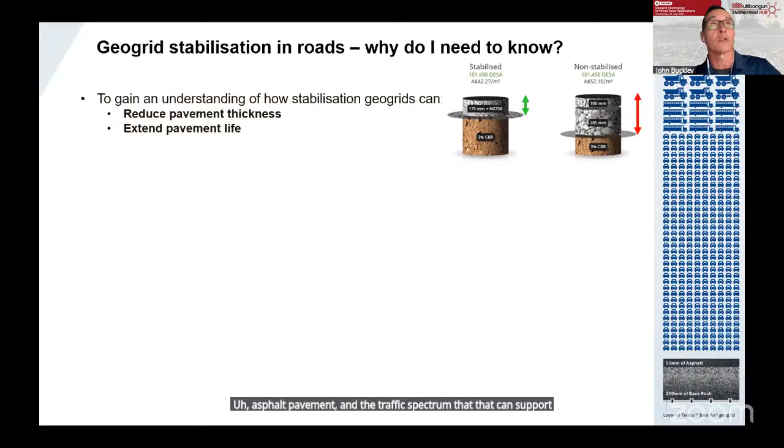So why do you need to know about geogrid stabilisation for roads? My aim in this presentation is to give you an understanding of how these geogrids can reduce pavement thickness, extend pavement life, and you can see a nice graphic there on a geogrid stabilised asphalt pavement and the traffic spectrum it can support over its design life. And then we can demonstrate how we can save cost, time, and carbon on pavement projects.

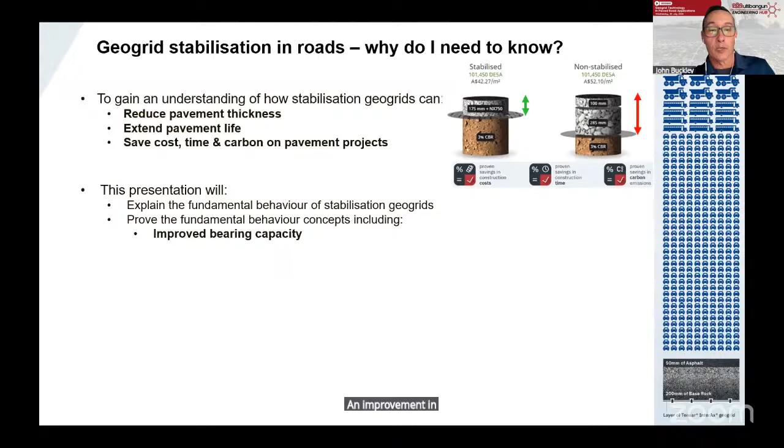In this presentation, I'll explain the fundamental behaviour of stabilisation geogrids, and I'll prove these concepts, which will include an improvement in bearing capacity of the system, enhancing the aggregate modulus, improving compactability, especially over variable subgrades, and improving the rutting performance of the pavement. That's our main performance metric, rutting.

Okay, so let's quickly talk about the main concept of stabilisation and the fundamental mechanism behind this. It's one of what we call lateral restraint of the aggregate, particularly when an out-of-plane or vertical load is applied, where the geosynthetic is placed horizontally. So the main function is lateral restraint for stabilisation, to reduce subgrade and surface deformation over the pavement life.

If we now focus on this graphic down the bottom right, there are two mechanisms occurring at the same time when a stabilisation geogrid is employed in the pavement. So under wheel traffic, if we first look at an element of aggregate above the geogrid, in the base course, as this system is being trafficked...

what this element of aggregate will experience is an increase in confining stress. This, ascribed to the stress-strain or stress-hardening behavior of aggregates, will lead to an increase in resilient modulus, or resistance to permanent deformation, of that aggregate.

Now if we look at an element of typically subgrade clay below the geogrid, as the wheel is trafficking this system, what that will experience is a reduction in shear stress to that element of subgrade clay. So through stress-softening behavior, if we reduce the applied shear stress onto the clay, we also increase the resilient modulus of the subgrade.

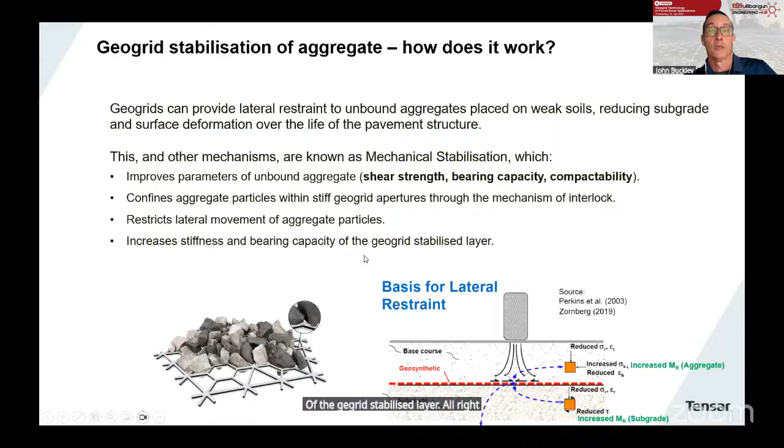Now I'll get straight into some full-scale relevant paved road research and trials. The first one we'll look at is a study done in West Virginia back in 2010. It was a comparative study, instrumented with earth pressure cells both in the aggregate layer and within the subgrade. The subgrade was a field-constructed subgrade to achieve a target CBR between 2 to 3%.

Horizontal earth pressure cells were installed in the subgrade to measure total horizontal stress, and also within the 600 millimeter thick crushed limestone paved section to measure the total horizontal stress within the subbase layer.

So the 4 sections I mentioned were a control, and 3 other geosynthetics, which included a 70 kilonewton per meter woven geotextile, a biaxial geogrid, and a multi-axial geogrid. This was trafficked with an 18-ton test truck.

The results showed that the multi-axial geogrid section had the highest horizontal stress within the subbase, but the lowest horizontal stress within the subgrade. I'll show you the results in a minute.

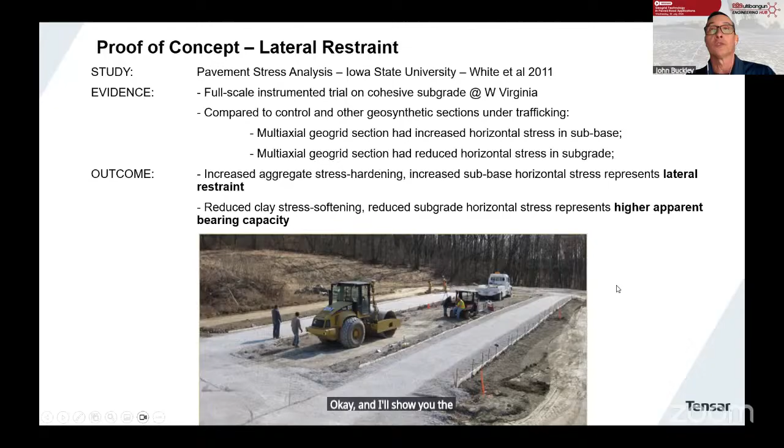If we just click over to the next slide, I'll highlight the multi-axial geogrid data there. The red line represents the control. So what we're seeing here is a graph of total horizontal stress on the vertical axis versus truck passes, with an 18-ton test truck. We can see the stress profile within the subbase layer shows the highest level in the multi-axial geogrid section, representing that confining stress applied to the aggregate.

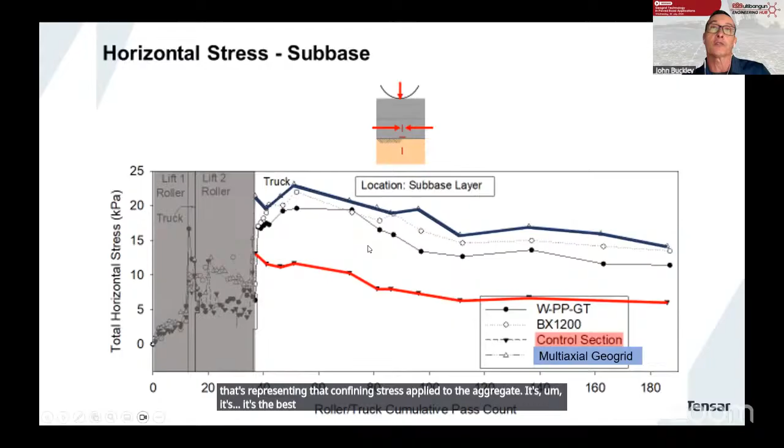Okay, so this is helping us prove our lateral restraint concept. Another aspect we want to prove is an improvement in subgrade bearing capacity.

We can do this by looking at the differences in applied stress to the subgrade clay through multi-axial geogrid stabilisation. Here we've taken a textbook chart of different consistencies of clay, from very soft to stiff. On the horizontal axis, we have the applied stress to that clay. On the vertical axis, we have its corresponding resilient modulus, which we can correlate to CBR by a factor of 10.

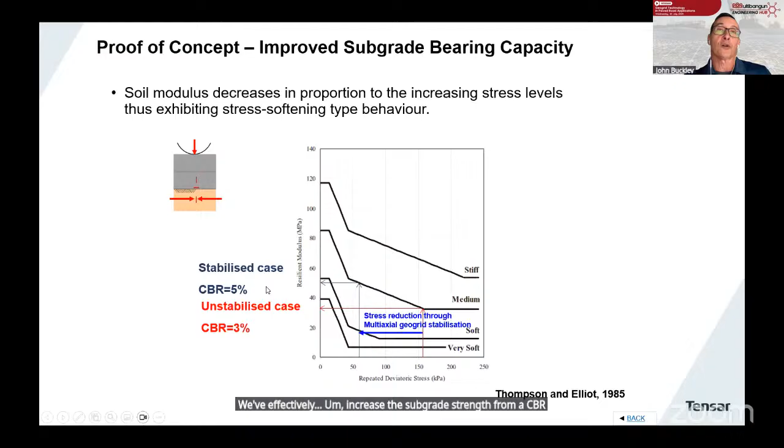If we can reduce the applied stress on that same clay through effective geogrid stabilisation, we come down to about the blue arrow and go across, and it represents a resilient modulus of about 50, or a CBR of 5. In this particular case, and this can be quite case specific, we've effectively increased the subgrade strength from a CBR of 3 to a CBR of 5. But it is very case specific, just be aware of that.

The next study I'd like to show you is one which proves the concept of enhanced aggregate modulus. This was an in situ investigation of a deep strength asphalt pavement done in Arizona, in the US, about 10 years ago, using an apparatus called an automated plate load testing machine.

So what this does - if you're familiar with the falling weight deflectometer, or FWD, that applies a seating load and then a dynamic load to the pavement, one or two or more hits. But this apparatus applies a high number of cyclic loads to the pavement, and it's able to do this very quickly, so you can very quickly back-analyze the strengths of different pavement layers in the field.

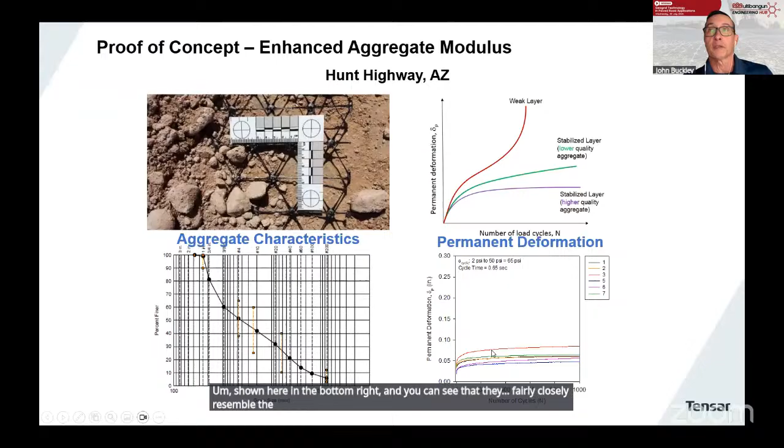Okay, so what are the characteristics of this particular pavement? I mentioned deep strength asphalt, but the subgrade CBR was not very low - it was actually reasonably high, typically higher than where you may think about using a geogrid. It was 10%. But this particular pavement had a high percentage of heavy vehicles, and ESALs over 8 million, 8.5 million actually, as a design value.

So for that reason, there was scope to include a geogrid - not so much to reduce the aggregate base thickness, because it was already heading towards a minimum thickness anyway, but there was scope to potentially reduce the asphalt thickness. This was done by looking at the design method employed for this pavement, because it was in the US - AASHTO 93. Tensar's had this as a module in its software for a long time, and it looks at layer coefficient values for unbound and asphalt layers.

Based on the thickness and a drainage coefficient, layers are multiplied then summed up to come up with an overall structural number for the pavement. So without the geogrid, this particular structural number—don't worry too much about the absolute value, but the relative differences—it was 3.87.

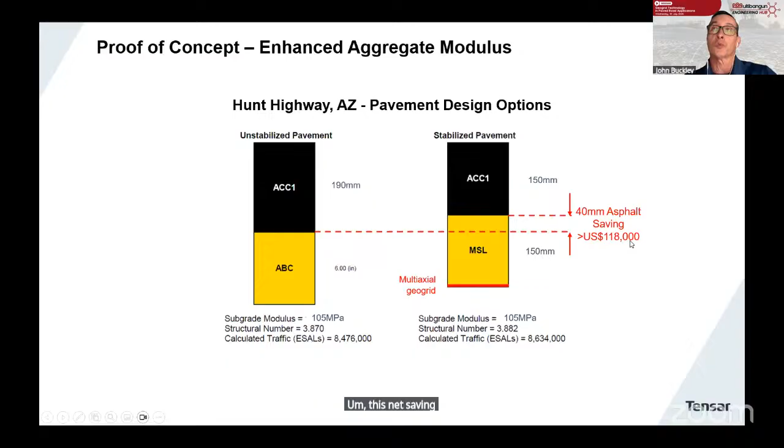This net saving was about $120,000 US up front. So that was fine—it was nice to have an upfront saving on this project.

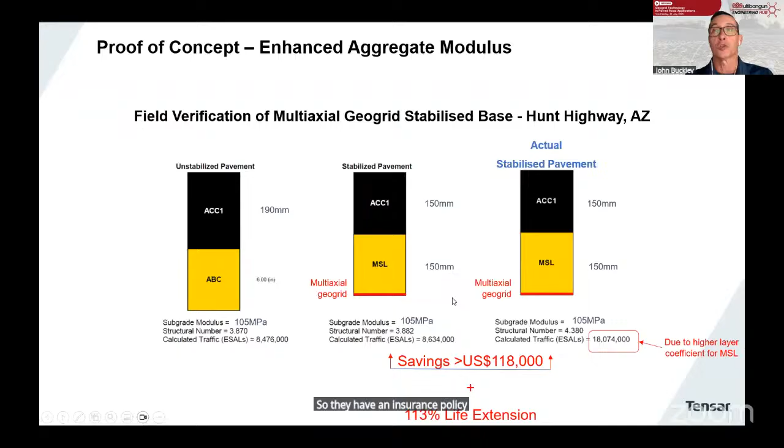So there were two benefits in a nutshell. The first was an upfront saving of about 120K US. The second, derived from the APLT results, was a 113% life extension. So they have an insurance policy with additional traffic capacity that this pavement can withstand.

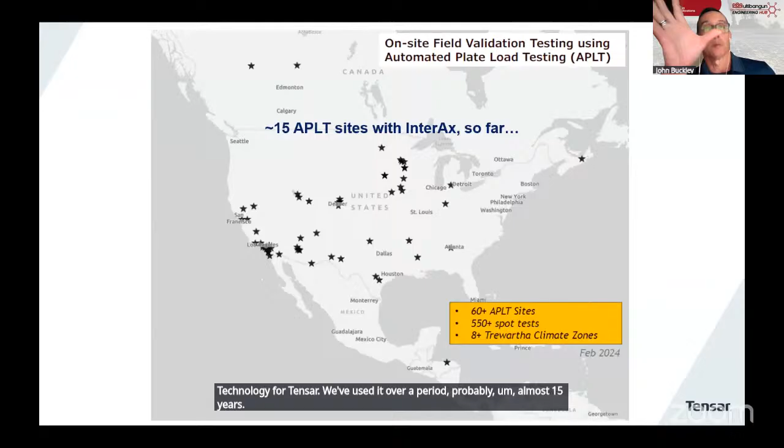This automated plate load testing equipment is an important technology for Tensar. We've used it over a period of probably almost 15 years, mostly in North America. It's an expensive piece of equipment and a bit hard to replicate outside the States where it was originally developed, but we've done over 60 sites around North America. With InterAx so far, we've got 15 sites, which have given us very good results and a good understanding of the behaviour.

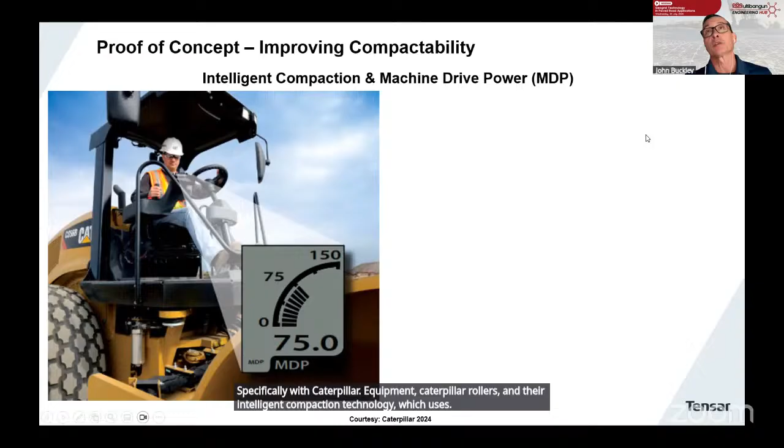What I'd like to talk about next is another concept I mentioned earlier, improving compactability. We've worked on this, once again over about a 15-year period, specifically with Caterpillar equipment, Caterpillar rollers, and their intelligent compaction technology, which uses a parameter called machine drive power. They've developed this specifically for CAT equipment—it's a soil compaction measurement technology which enables a compactor to act as a proof roller, measuring in real time the rolling resistance of the drum to give an indication of soil stiffness.

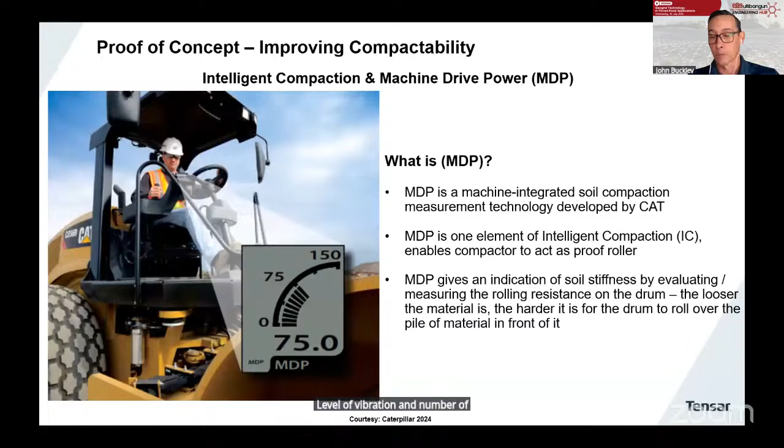To get an idea: the looser the material is, the harder it is for the drum to traffic over that material, and vice versa for harder material. So material can be calibrated for this property called machine drive power, and the compactive effort can be adjusted accordingly in terms of level of vibration and number of passes. It's quite a novel and interesting technology.

Now you're probably wondering, how does machine drive power, or MDP, compare with more established pavement evaluation techniques? These charts, I'll run through them one by one to give a nice indication of this. We'll focus mainly on test bed 4, which was the geogrid section.

If we compare it with these red dots, which are modulus values from lightweight deflectometer, you can see there's quite a good correlation there. Then if we compare it with FWD results, modulus derived from FWD, you can also see there's quite a good correlation, and it's fairly consistent across that section.

The next one is nuclear densometer results, shown as these greenish diamonds, and you can see also a good correlation. The last one is looking at moisture content of the pavement materials and how it relates to optimum—these are the black diamonds, and once again, quite a good correlation.

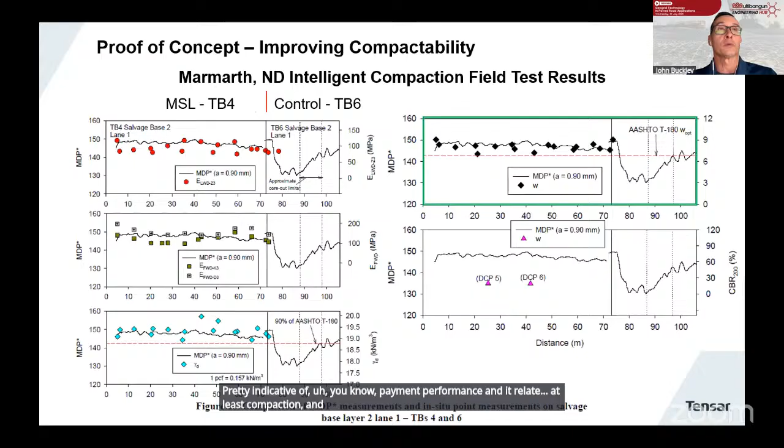Okay, so the results. This technology enables real-time mapping of compactive effort by pass, and we can see here the 2 results: the stabilisation geogrid in TB4 versus the control.

In the geogrid section, even though the subgrade was highly variable, they were able to achieve target compaction in 5 passes evenly through the 60-metre section. Don't forget, this was a salvage base material, so it wasn't the best quality, but they got it down to an acceptable compaction standard within 5 passes. For the control, different story - very variable, high number of passes. They actually lost track of the number of passes, and they didn't achieve their compaction.

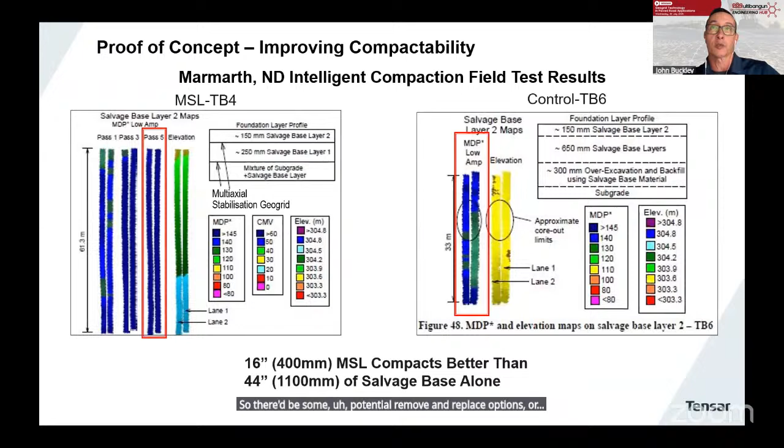So there'd be some potential remove and replace options, or potentially chemical stabilisation. There are other options there for that. Okay, so that's about compactability.

I just want to quickly mention we've also done work on expansive subgrades. This was done by a professor called Jorge Zornberg and his researchers at University of Texas in Austin, going back to 2018 for FHWA. Essentially, a very wide range of geosynthetics were evaluated across 10 sites in 80 sections to look at improvements in environmental performance and traffic performance, particularly longitudinal cracking, transverse profiles, and rutting.

Essentially the multi-axial extruded stabilisation geogrids shown here, 4 of those out of the whole lot performed in the category, most of them excellent and 1 very good. So compared to a lot of biaxial products, the multi-axial geogrids performed the best.

Right, so I'd like to talk about improving rutting performance now. This was an InterAx trial done in Norway a couple of years ago over about a 13-month period. It was on an entrance into a quarry, so a very wide spectrum of quite heavy traffic, amounting to just over 67,000 standard axles.

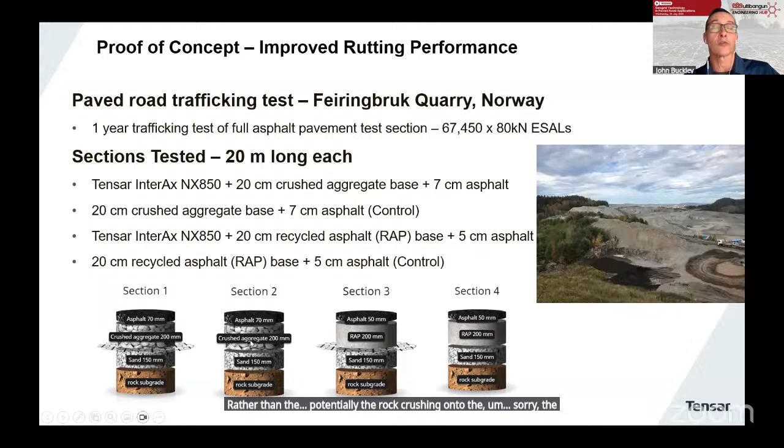So rutting performance was looked at with this device here, this vehicle, which is a laser profilometer. This provided transverse and surface shape scans throughout the trafficking period at 4 different time periods: once before trafficking, twice during trafficking, and then once after trafficking.

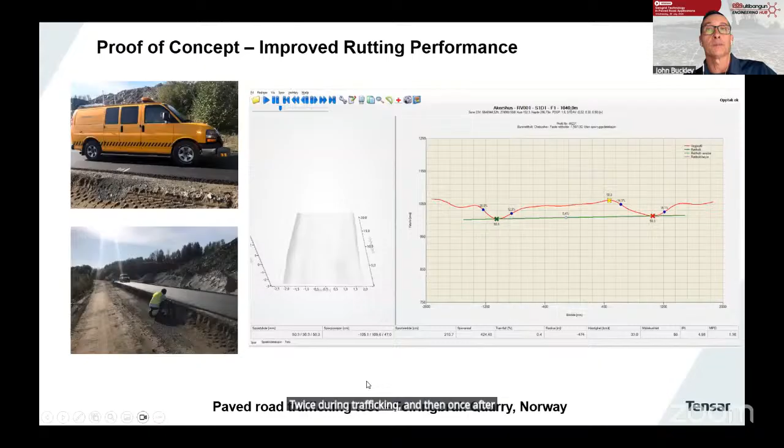Okay, so average rut depths were calculated. You can see the 4 readings in this graph and in this table in the bottom right hand side. Essentially, if you focus on the green highlighted column, it shows that for each of the Geogrid sections, sections 1 and 3, they had a lower increase in average rut depth than their control section counterparts.

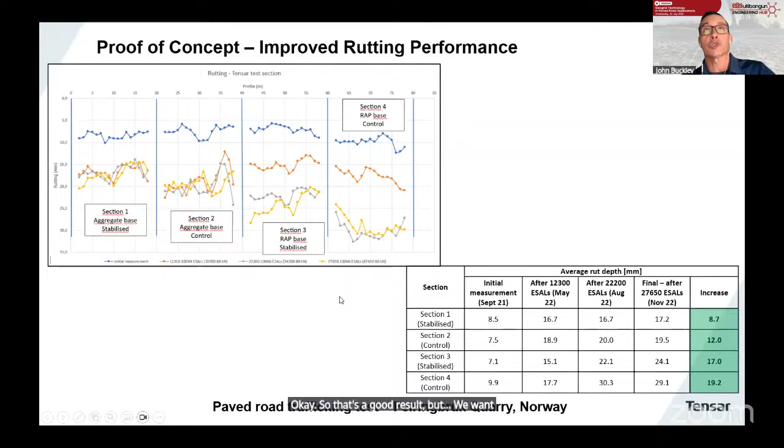Okay, so that's a good result, but we want to make sure that we're actually comparing apples with apples, and that each of these 4 sections were constructed to the same thicknesses.

So after the testing, they did some excavations, some trenches through each of the sections to determine that, and it was found that on average, the sections weren't exactly the same, unfortunately. In sections 1 and 2, the Geogrid section aggregate thickness was about 70 mil thinner than its control. In sections 3 and 4, the asphalt was about 7 mil thinner, and the RAP base was about 50 mil thinner.

So we weren't directly comparing apples with apples, and this information is good to know so we can adjust or normalize the results somehow. The way we do this is by creating a model in a mechanistic empirical design package, and the researchers here used AASHTOWARE from the US, calibrated against the observed results for the control sections over the trafficking period.

You can see the results here in terms of rutting, and the actual measured results were the circles. The black line is the model, and there's generally pretty good agreement. So we've established a model for each of the sections where we can make adjustments and hold certain things constant to properly evaluate performance.

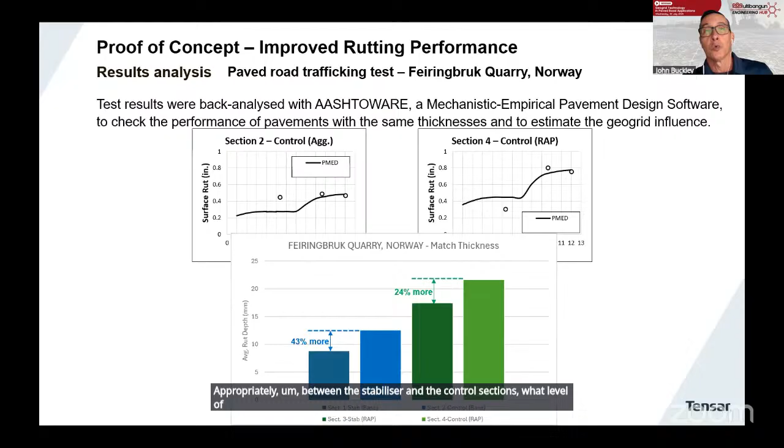The first thing we held constant was: if we match the thicknesses appropriately between the stabilized and the control sections, what level of rutting would we expect to experience? Between sections 1 and 2, with the aggregate base, the control for the same thickness would experience 43% more rutting, and for the RAP sections 3 and 4, 24% more rutting in the control for the same thicknesses.

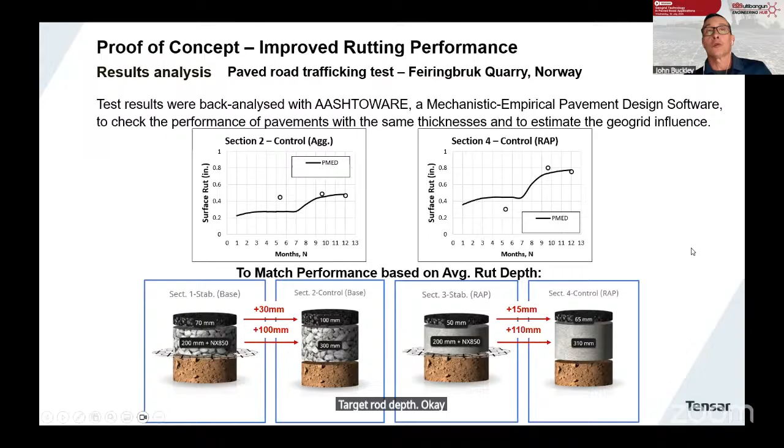Then if we wanted to match performance based on the same target rut depth, we would need 30 mil more asphalt in the control for section 2, and 100 mil more aggregate base. Between sections 3 and 4, we'd need 15 mil more asphalt and 110 mil more RAP to get the same target rut depth. This is important to do to get the best understanding of the performance differences.

This full-scale trafficking test was able to demonstrate a significant increase in pavement life from the Geogrid stabilised section, a significant reduction in pavement thickness, or you can combine the two to get somewhere in between. So we can save initial construction cost, time of construction, and the carbon footprint of construction activities, and also reduce life cycle costs in terms of maintenance and the associated carbon footprint over the life of the pavement.

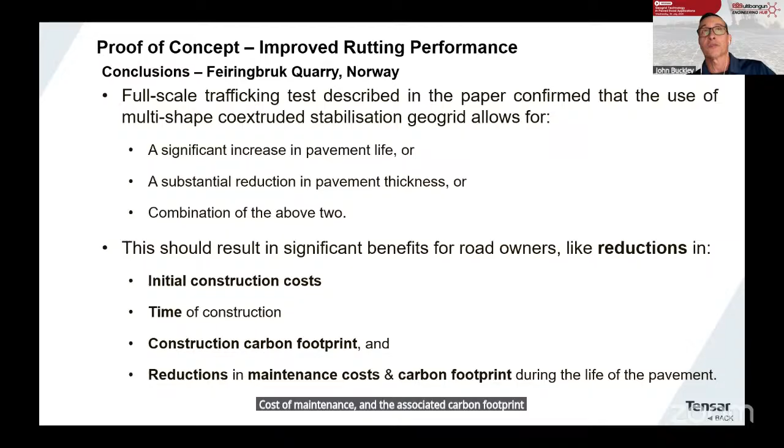The next study I'd like to show you is with an accelerated pavement tester over in South Africa, run by an organisation called CSIR. This was done with InterAx in the last couple of years, over a fairly competent subgrade with a CBR of 7.

Once again, a directly comparative study with the control: 200 ml of select fill, 150 ml of CTB, and 200 ml of a fairly good quality base material with 50 ml of asphalt. This has been done before - it's not typical, but the Geogrid itself was installed directly under the cemented layer, the cement treated base. You'll see the benefit of that in a minute.

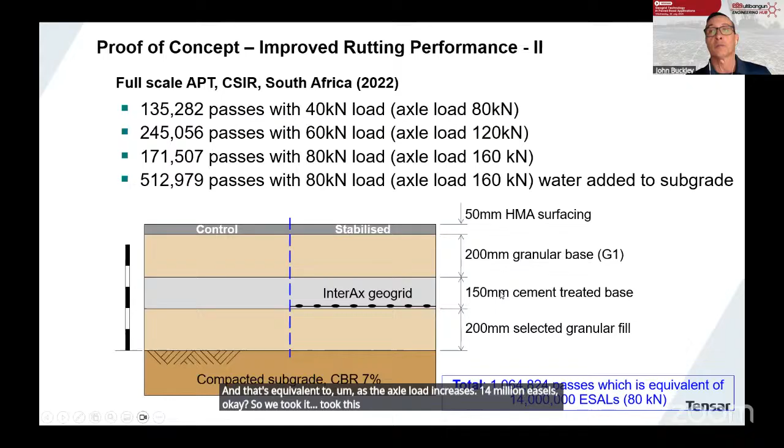The accelerated pavement tester was able to increase the wheel load - it's a dual wheel, one half of a standard axle - from 40 kilonewtons to 80 kilonewtons at the end of the test, so that's a 160 kilonewton axle load. All up, if you sum all these passes, it's just over 1 million, and that's equivalent to, as the axle load increases, 14 million ESALs. So we took this testing to 14 million standard axles.

Let's move on - and these are the results. Here we've got trafficking in terms of ESALs on the horizontal axis versus the mean rut depth. This red line is the control behavior, and we can see that the final rut was approaching 25 mil. Up until about halfway through the test, the stabilized section was performing just only slightly better than the control.

Until water was added into each of these profiles, and you can see here that the control experienced quite a drastic deterioration in terms of rut depth. But the stabilized section basically kept going at about the same slope. So it exhibited very good resilience when water was added to the pavement formation, particularly affecting the cemented layer, where at that stage, halfway through the testing, it's probably cracked.

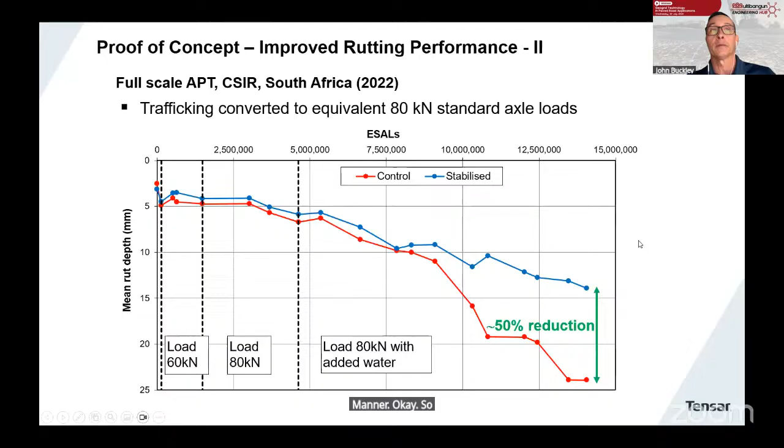So the effect of water could be quite drastic without an effective stabilization geogrid to help provide that lateral restraint to the cemented layer, which is now acting in an unbound manner. So we saw a 50% reduction in mean rut depth there. We are doing a second phase at CSIR.

That's how important this work is, with slightly different pavement configurations, and we'll keep you posted on those results.

Just a quick discussion on lime stabilization now. We're going to compare geogrid stabilization to lime stabilization, in particular in situ lime stabilization rather than plant mixed. This graphic is an application guide originally for geogrids, and you can see the applications are very wide in terms of subgrade type, subgrade strength, and application areas. The range for lime is quite scientific and well studied, but it's a narrow range of application—not really suggested for organic clays, and you have to satisfy PI and plasticity criteria for it to be applicable.

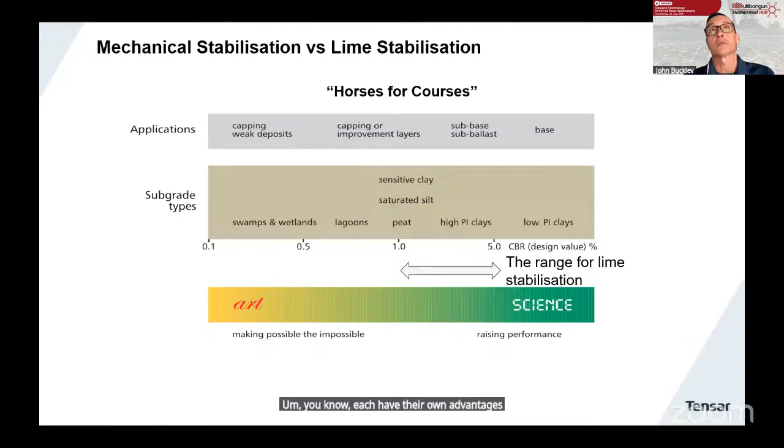So we'll talk about that in more detail, but it's really horses for courses—each have their own advantages and disadvantages. I've already spoken about some stabilization advantages: reducing thickness, increasing life—we've demonstrated that—but also evening out differential settlement particularly over variable subgrade conditions, improving bearing capacity, and potentially capping over weak subgrades or voids. But because there are so many combinations of soil types, loading conditions, application areas, and geogrids themselves, we rely heavily on observational techniques for performance.

Lime, because it's applied through a fairly narrow set of subgrade conditions, has benefits that are quite well understood in terms of short-term drying, improving handling of the material and its conditions, and reducing swell and plasticity. The long-term benefits are also well understood in terms of durability, strength, modulus, and strength gain.

The impact on site is quite different between geogrid and lime stabilisation. In Australia, where I'm based, using lime in urban areas is becoming quite frowned upon and is definitely not preferable—so it's generally used in more rural or semi-urban areas. It also has high mobilisation and demob costs, which can significantly impact small to medium projects. Getting the stabilisation equipment out on site can be expensive.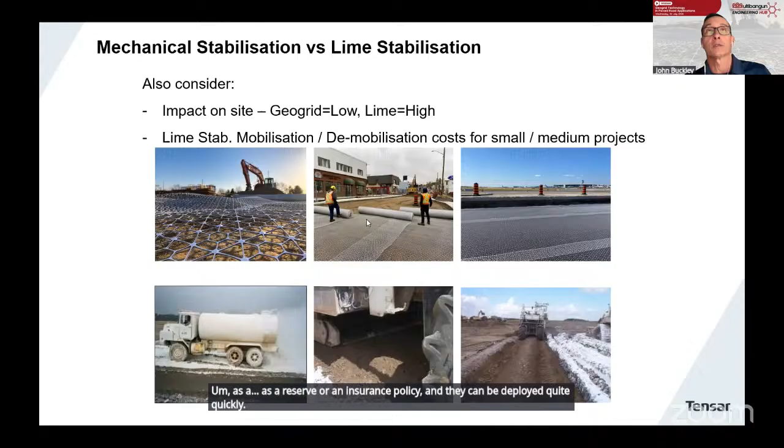It's potentially a reversible reaction, lime stabilisation with clay. If you don't get the dosage rate right, under certain conditions lime can potentially leach back out of the pavement system.

For geogrids, it retains a free draining system in terms of the permeability characteristics of the stabilised aggregate—it will retain its inherent permeability over a longer time period under a cyclic loading regime, because we're providing lateral restraint and reducing abrasion of aggregate particles.

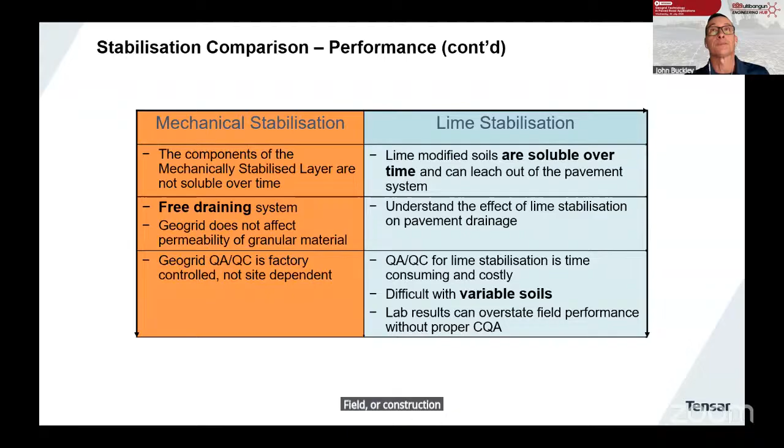In terms of installation, geogrids have over 40 years of experience being installed in very soft conditions, and we can give you guidance and appropriate techniques to assist you there. With lime stabilisation, it's not really used in urban areas because of the safety and environmental issues related to dust and potential caustic runoff.

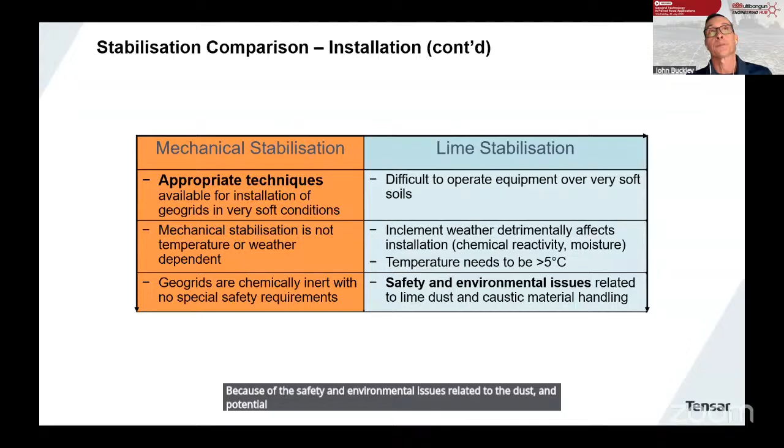So in summary, it really is horses for courses. We find that, particularly in our region of Australia and New Zealand, lime can be over-specified, not always appropriate. But where lime modification is used on a swelling subgrade, and then geogrid is used over the top to stabilise the aggregate and prevent reflective cracking issues, they work very well together.

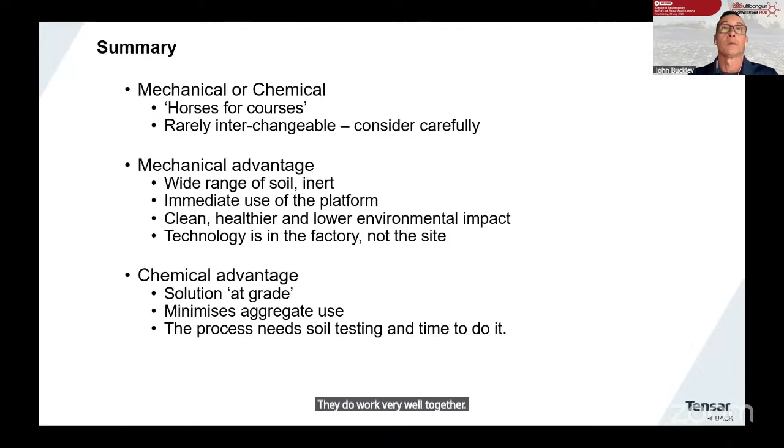Now this is the second part of my presentation, where I'll quickly run through some Tensar Plus examples to give you familiarity with our cloud-based, freely available software package, which shows your value in terms of cost, time, and carbon.

Starting with Austroads, it relates to part 2 of the pavement structural design guide, which is currently being updated. We're not saying this is specifically endorsed by Austroads in any way. What we're saying is that for the non-stabilised sections, where you don't need Geogrid, you don't need to refer to the design charts to read off the thicknesses from your subgrade CBR and DESA—they're already provided and embedded for you within the software.

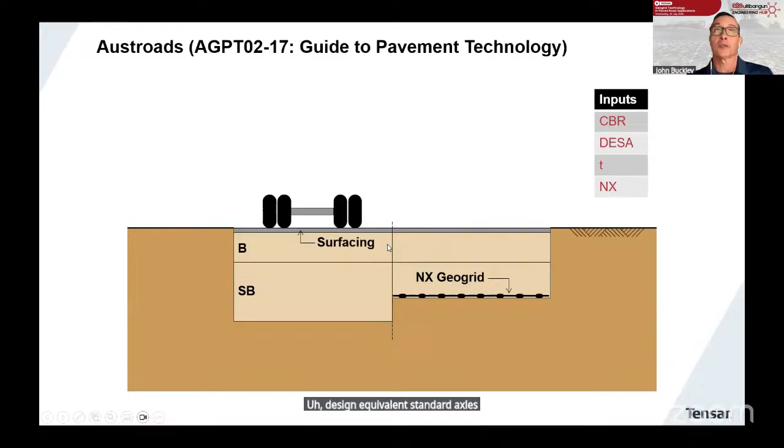This relates to the standard chart of figure 8.4, and for low volume roads, figure 12.2. The inputs are simple: subgrade CBR and DESA, design equivalent standard axles, and the outputs are the thicknesses of layers and the grade of the geogrid.

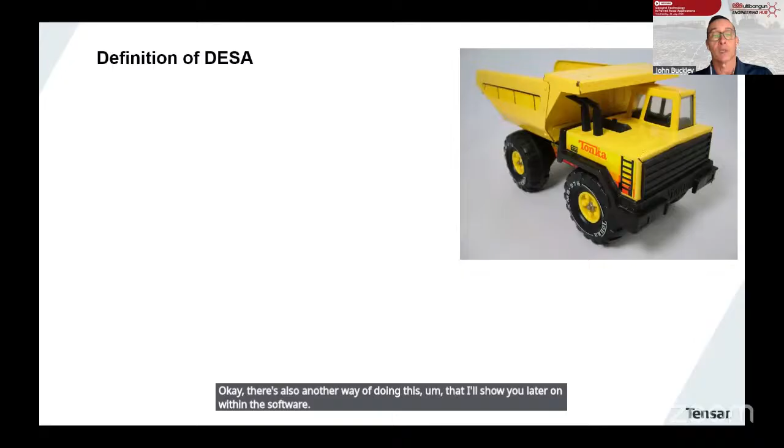DESA is defined as design equivalent standard axles—80 kilonewton axles that are equivalent in damaging effect on a pavement to a given vehicle or axle loading. That's direct out of Austroads. And remember, axle load to axle damage is not a linear relationship, it is exponential.

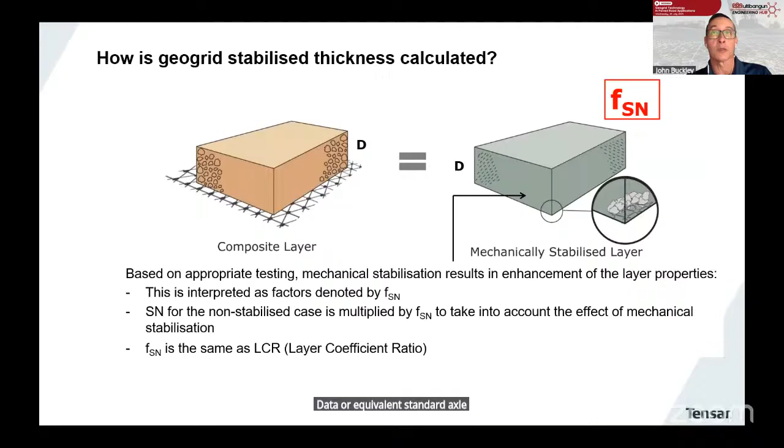So how is the geogrid-stabilised thickness calculated? We use a factor called the structural number factor, which comes from AASHTO 93. As I mentioned before, that's been embedded in our pavement design software for a long time, and it's essentially the same—it takes into account the benefit of the grid and applies a reduction in thickness to achieve the same target DESA or equivalent standard axle loadings. It's the same as the layer coefficient ratio used to reduce thickness.

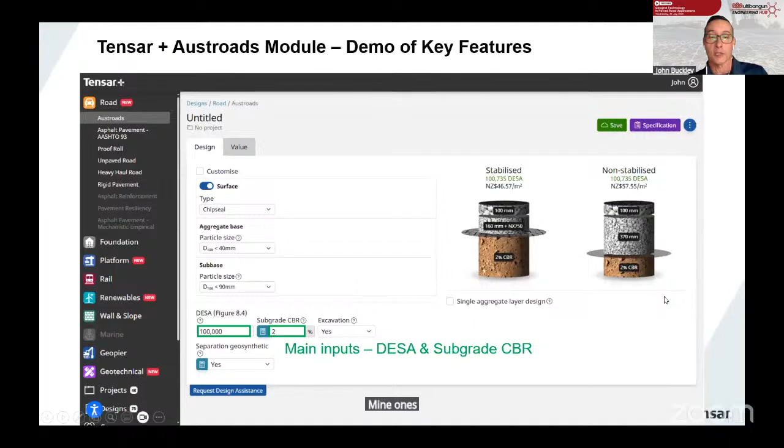So let's have a quick demo of the key features of the Austroads module. You'll find it under road. Here are your inputs, highlighted in the green boxes—the main ones are DESA and subgrade CBR. Then the chip seal surface, selected by default. The particle size for the base and subbase governs selection of the geogrid, whether it's a standard or a large aperture geogrid. You also have the option to add a geotextile separator, a non-woven geotextile below the geogrid—it doesn't affect the pavement structurally, it just shows on each of the sections.

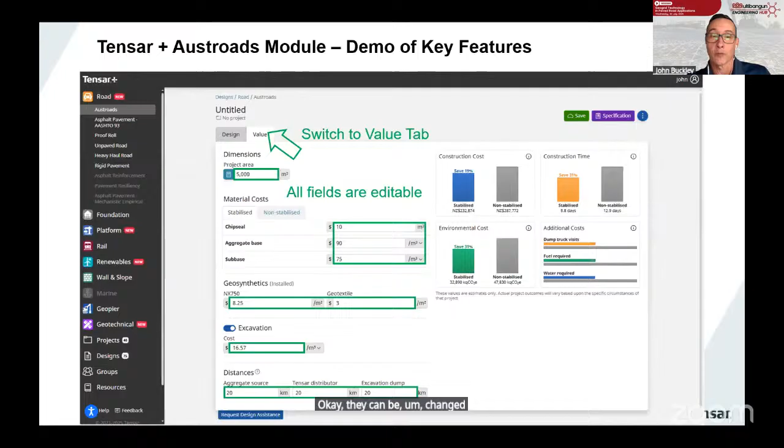If we switch to the value tab, all of these fields are editable—they can be changed by the user, and we suggest you do this on a project-by-project basis to make sure you've got relevant data. There's also a function here for project area, so you can calculate from length and width, and add successive sections. For things like a residential development with a lot of roads, or a renewable energy development, this could be quite useful.

As a tip, ensure that the costs are the same between stabilised and non-stabilised sections. Sometimes you may have configurations where the stabilised section is slightly different to the non-stabilised, and the costs may not be carried across appropriately. So just double check that if you see anything funny happening with these column charts for cost, time, and carbon, which show you the savings.

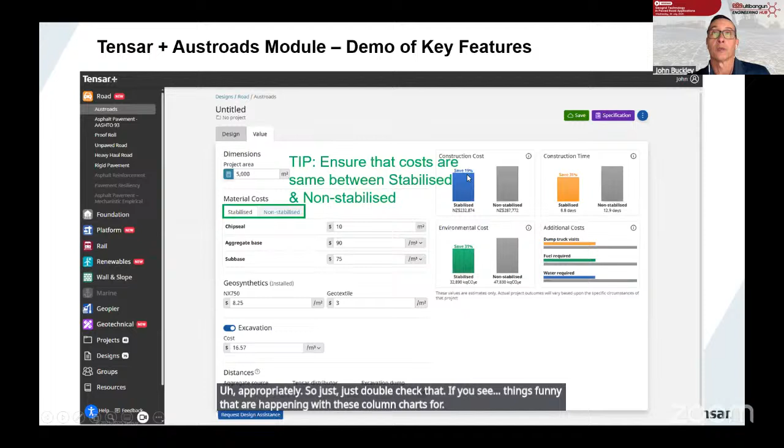Okay, I'll talk about the proof roll module now. What is it? A proof roll is a way of assessing strength, stiffness, uniformity, and compactive effort of material by moving a heavy plant over the surface and observing either deflection or deformation.

This is from Austroads. It can be done on earthworks, pavement foundation, or pavement structural layers. There are usually project-specific deflection and deformation limits. This gives you an example of a typical proof roll vehicle.

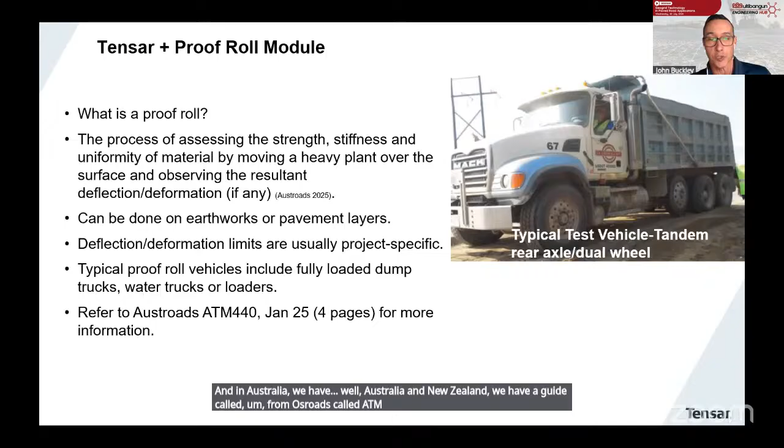They can be dump trucks, water trucks, or loaders. In Australia and New Zealand, we have a guide from Austroads called ATM 440, which was just republished earlier this year. It's a nice, brief, succinct guide to proof rolling without being too specific.

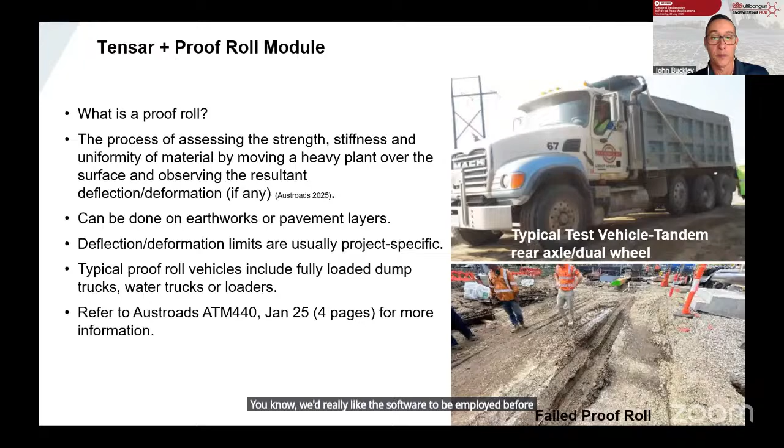A lot of times we're asked to fix failed proof rolls, where we'd really like the software to be employed before this happens, just to make sure you have the best chance of success.

So to demo the key features of this software, it's here under Road, and there are tooltips shown as question marks, which give you more information on specific aspects of the inputs and sometimes the outputs.

This one gives you more information on the proof roll vehicle, and then you can look at different options for the proof roll vehicle through that drop-down button there. So you've got dump truck, water truck, and a couple of loaders, also the ability to put in a custom vehicle.

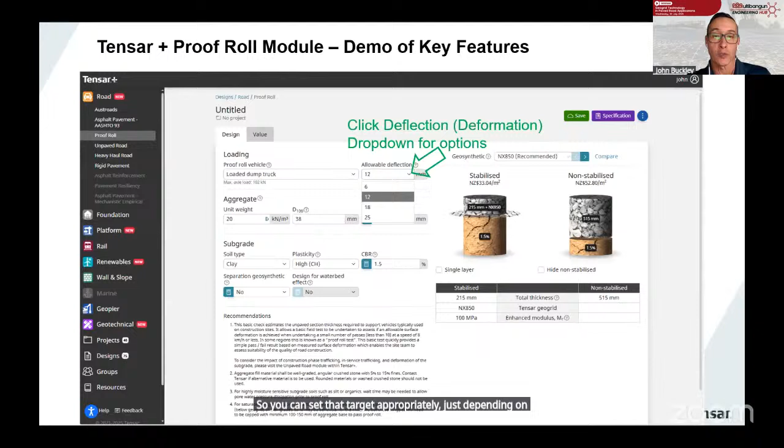For the deflection or deformation targets, you've also got four options there, so you can set that target appropriately, just depending on how critical your project is. You've got some basic inputs for the aggregate.

If we click on the CBR tooltip, the question mark, it takes us to this little guide, which is similar to the one I previously showed you from the Australian standard, but this relates to trafficking of the subgrade in terms of walking or driving over it to estimate subgrade CBR.

So slightly different guidance. If we click on the CBR calculator, in there are correlations from undrained shear strength. If you've done some shear vanes, you can correlate that to CBR, but there are three different correlations, and just be careful with them. Don't always use the one that gives you the most favourable CBR. Use appropriate care and judgment depending on the criticality of the project.

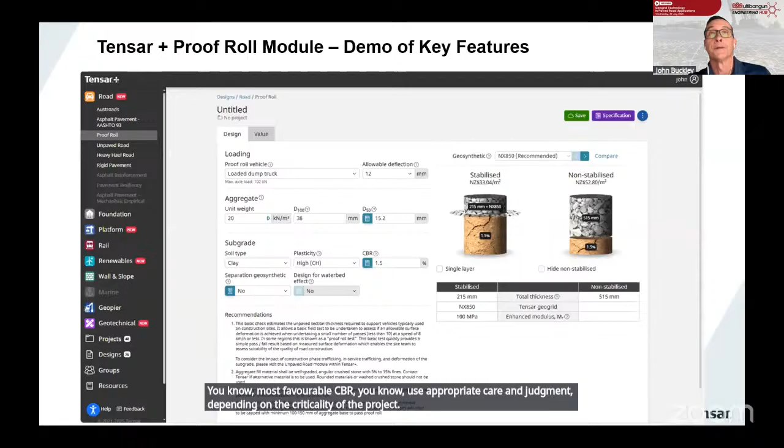There's some recommendations here as well, which I urge you to read, that give you background on the module. The main one here, number 1, defines what the proof roll test is based on: up to 10 passes of the proof roll vehicle travelling up to 8 kilometres an hour, and looking at the deformation after that.

There's also some other guidance there on the aggregate type and how to deal with particularly moisture sensitive subgrades and saturated subgrades. Those are also important to consider.

If we then switch to the value tab, we can see different options. Once again, we can see the column charts showing us the savings in cost, time, and carbon.

We look at the excavation options, and they can be just meeting grade, either above or below the existing grade, so showing a height or depth. And then...

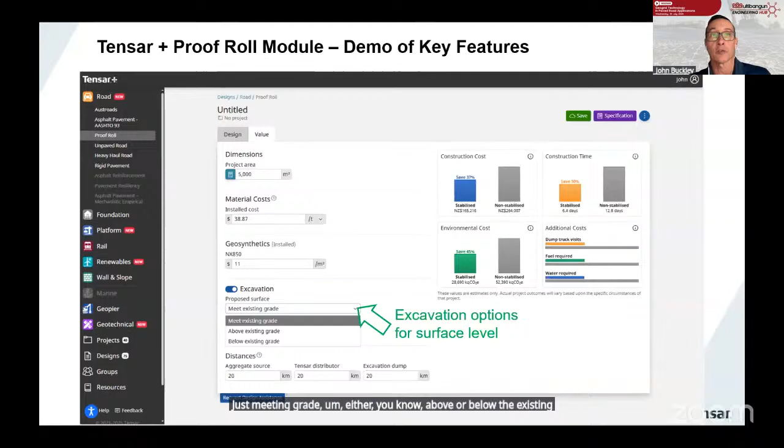In this particular case, what we've got here is quite a significant saving in construction time, and this might be the key factor, the key decision maker for this project, and this could really affect the overall length of time for this project. So if you can avoid rework and you're already saving 50% in construction time, that may be the key factor in using this proof roll module.

Just to show you also our resources section. This is important too, to give you background, and it relates to case studies, installation guides, but also white papers for each of the application areas: road, working platform, rail, and foundations.

There's some key white papers here which give you background information on how these methodologies have been derived. So if we just click on one of those, it opens up a web page where you can access or download that particular document like that.

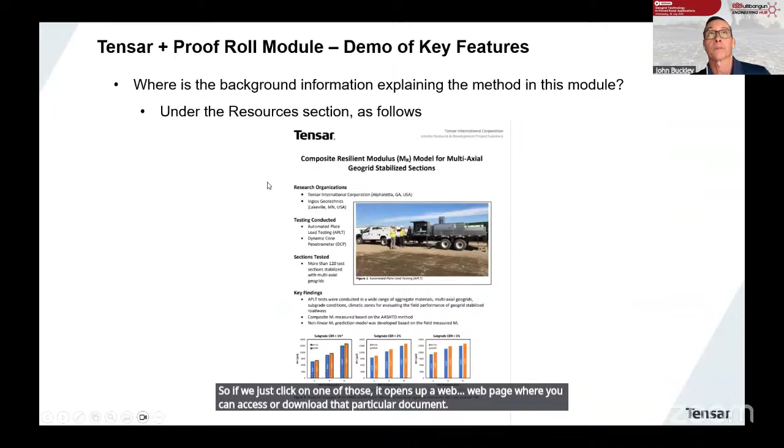For specifications, these are available through the purple button you can see here. They are performance specifications, which if you then decide to print, are not at all related to index properties of the grid. They're related to the performance aspects specific to your particular design. These can be added into your project specifications.

For more options, I'll highlight this. One of them is currency. I've just recently been in New Zealand, so the currencies are shown in New Zealand dollars. This is where you can change to rupiah. I know a lot of the audience will be from Indonesia, so this is where you change to your local currency. You've also got additional options in terms of the print output.

If we look at that, it's separate from the specifications, but it gives you a summary of the input parameters, the two different sections, the cross sections, and the output. It summarizes all that quite nicely for you.

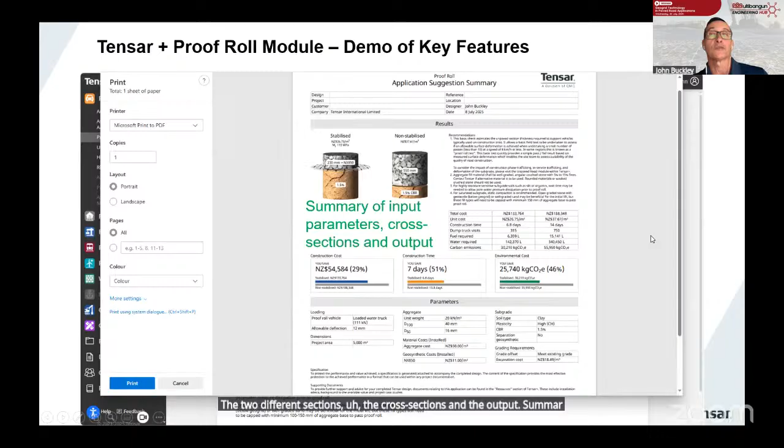The designs can be shared with colleagues or other people. You do need to save your design first, and then you can share it. It can be done in one of two ways: directly via email, or you can just copy a link and then paste it into another email if you like.

So just on the key takeaways for the Austroads module, I'd encourage you to play around with any of the modules within Tensar Plus, but specifically, look out for opportunities to economize on the stabilized sections using the single aggregate layer design option. I didn't get time to explain that today, but you're welcome to play around with that. You also have a customize button, so there are things you can do - you can turn aggregate layers on or off, adjust thicknesses, and add geogrids using the customize button. And always use project-specific costings for everything.

For the proof roll module, just investigate the sensitivity to different vehicle types, the deformation targets, the subgrade CBR, and in particular subgrade type. If you input silts and fine sands, you may have an option for the waterbed effect, which has a significant impact on the proof roll platform thickness. So play around with that and become familiar with inputs for custom proof roll vehicle types.

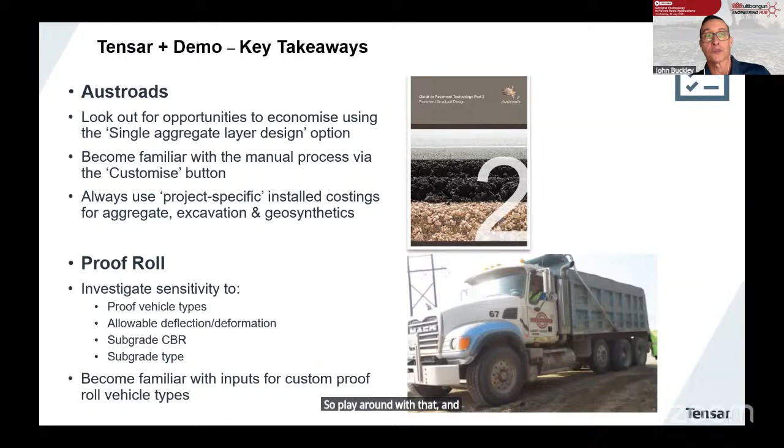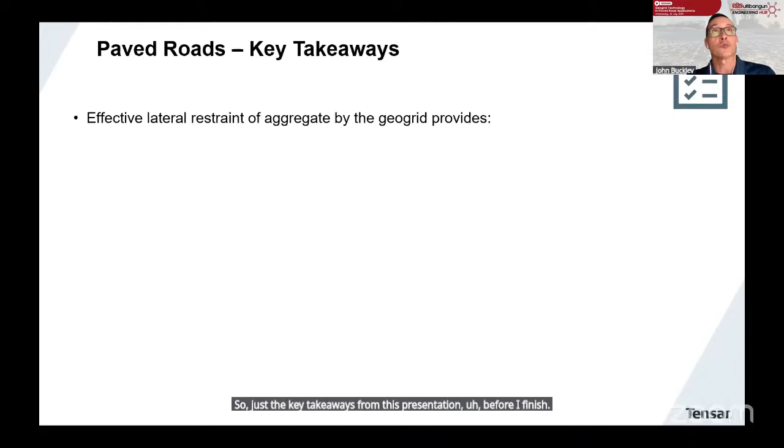They are quite specific. So just the key takeaways from this presentation before I finish: the lateral restraint of the aggregate provided by the stabilisation geogrid gives you improved subgrade bearing capacity, enhanced aggregate resilient modulus, improved compactability over weak variable subgrades, and enhanced rutting resistance of the pavement structure. Through our research, we've been able to prove each of those concepts.

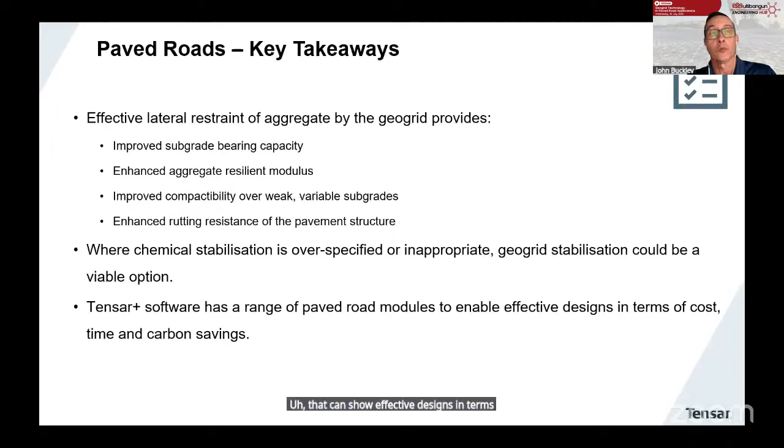Where chemical stabilisation may be over-specified or may not be appropriate, geogrid stabilisation is a real option. The software has a range of paved road modules, as well as a lot of other things that can show effective designs in terms of value, which we measure as cost, time, and carbon. Okay, time for any questions, please. Thank you.

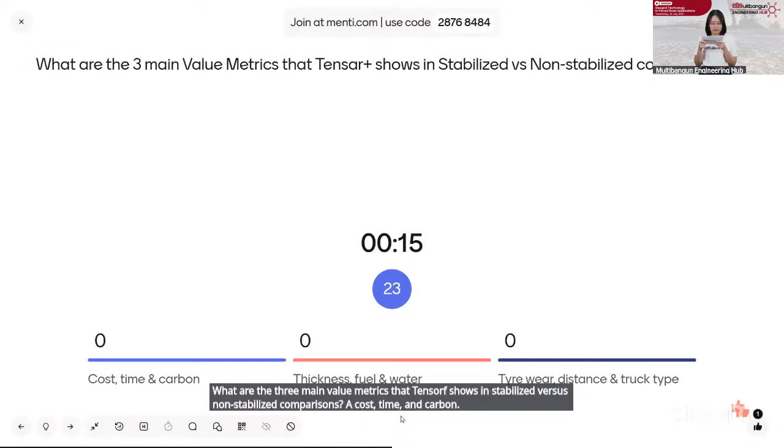Kita lanjut ke pertanyaan ketiga. What are the 3 main value metrics that Tensar shows in stabilized versus non-stabilized comparisons? A. Cost, time, and carbon. B. Thickness, fuel, and water. C. Tire wear, distance, and truck type.

Ayo, jawabannya apa ya? Apakah A? Apakah B? Atau C? Benar jawabannya adalah A. Cost, time, and carbon.

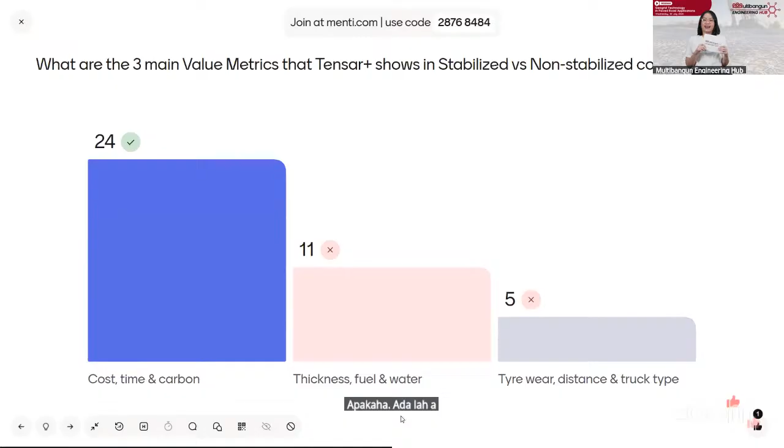Oke, siapa pemenangnya? Pemimpinnya masih Yoga Lendistanu, mendapatkan poin sebesar 2.854, diikuti oleh Albert Daniel dan Laura Fahmi.

Kita lanjut ke pertanyaan keempat. Sistem dinding penahan tanah multibangun yang menggunakan soil bag sebagai facing adalah A. SierraScape Retaining Wall System, B. MULTIBLOCK Retaining Wall System, C. Wraparound System. Apa ya jawabannya? Saya tahu sih jawabannya.

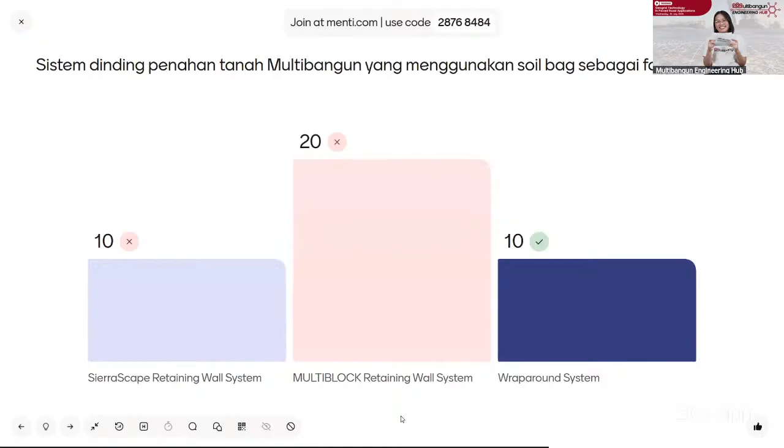Bener, jawabannya adalah C. Wraparound System. Banyak yang salah ternyata ya. Siapa nih pemimpinnya? Berubah, jadi Albert Daniel nih yang pemimpinnya dengan poin 3.782, diikuti oleh Femi Andiani dan yang ketiga adalah Tavera Wiharja. Oke, ini pertanyaan terakhir.

Siapa nih kira-kira yang mendapatkan e-money 300.000? Apa salah satu masalah yang dapat terjadi pada tanah dasar yang lunak, ekspansif, atau gambut? A. Terjadi penurunan setempat, jalannya bergelombang. B. Peningkatan daya dukung tanah. C. Peningkatan kekuatan geser tanah. Ayo, yang cepat jawabnya.

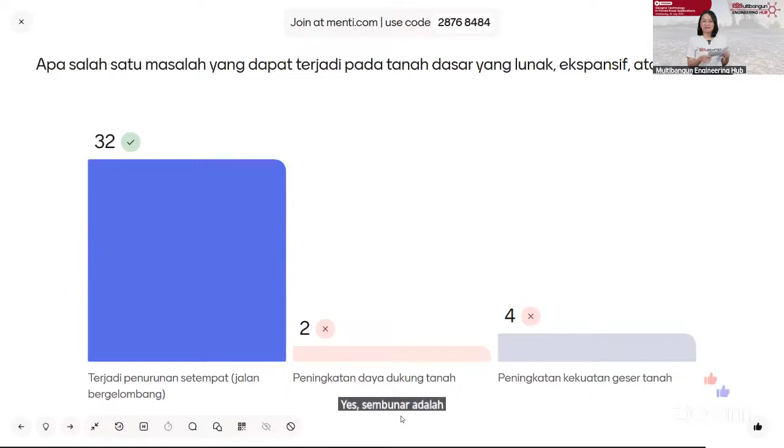Biar kita tahu siapa pemenangnya. Yes, yang benar adalah terjadi penurunan setempat. Ada 32 nih yang benar. Siapakah yang berhak mendapatkan e-money?

Kita lihat. Congratulations kepada Albert Daniel mendapatkan poin sebesar 4.716 poin. Dan diikuti oleh Femi. Dan yang ketiga adalah Tavera Wiharja. Congratulations to all the winners. Tepuk tangan guys, thank you.